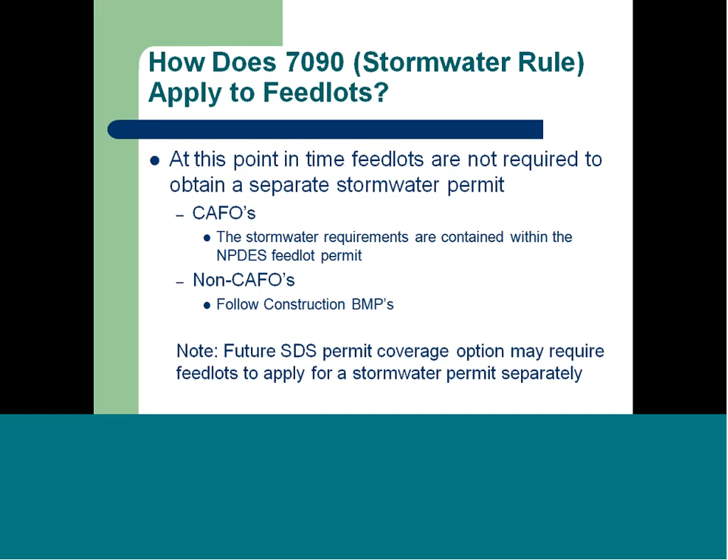So the basics of stormwater. If you're disturbing 1 acre or more of land, you need what's called a SWPPP, a Stormwater Pollution Prevention Plan. You have to develop one. Doesn't mean we have to review it, doesn't mean we have to look at it, just means you have to have one on site. Now if you're going to disturb 3 acres or more, which would be pretty large construction projects, then you are required to submit it with a permit application.

That really is different than it was maybe 5 years ago. You're required to automatically submit a SWPPP if you disturbed 1 acre, but this is more in line with the actual stormwater program. They don't look at all the stormwater pollution prevention plans either, they just do the bigger projects. So that's kind of what we're looking at there.

Now, if you're replacing existing pervious surface such as grass or cropland with impervious surface of 1 acre or more, you have to have a permanent stormwater management system. That's what you think of when you think of stormwater ponds, maybe an infiltration area for stormwater or something along those lines.

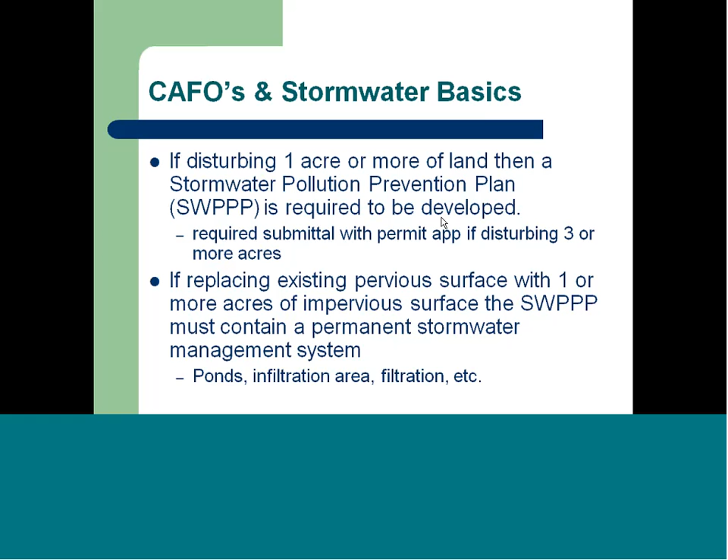For non-CAFOs, the basics are follow the BMPs laid out in the fact sheet. There are really no additional requirements. They can always get a construction stormwater permit, but the stormwater rule actually exempts them from needing a permit. It gives them automatic coverage underneath the stormwater general permit without even applying. This is all based on a 2004 memo that was done during the stormwater rulemaking process. So all they have to do is make the proper notifications, get the proper feedlot permit, and follow the construction BMPs, and they are covered with the stormwater.

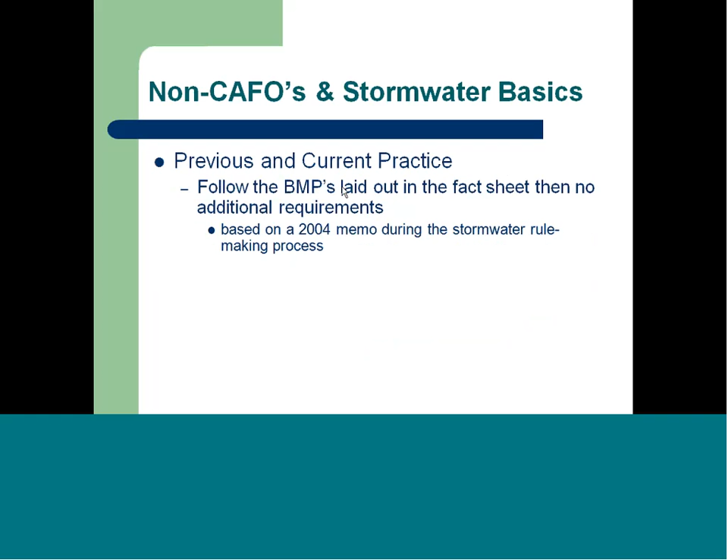Okay, the construction BMPs, these apply to all sites regardless of the need for a SWPPP or anything else. Some of these are pretty much common sense things. You don't want to disturb more area than you have to. I don't think anybody wants to do that. It just costs money to disturb that area. Stay out of there if you don't have to go in there.

Control the tracking of soil into roadways, maybe a rock construction entrance, something like that. Working at times where you're not going to track mud on the road. Tracking mud on the road is something that we get complaints about all the time. So the neighbors will notice if there's mud in the roadway.

Provide energy dissipation where stormwater leaves the site. Think of that as like riprap on the end of a channel to convey stormwater off the site, or a bale check of some sort to keep the water from running straight through the site.

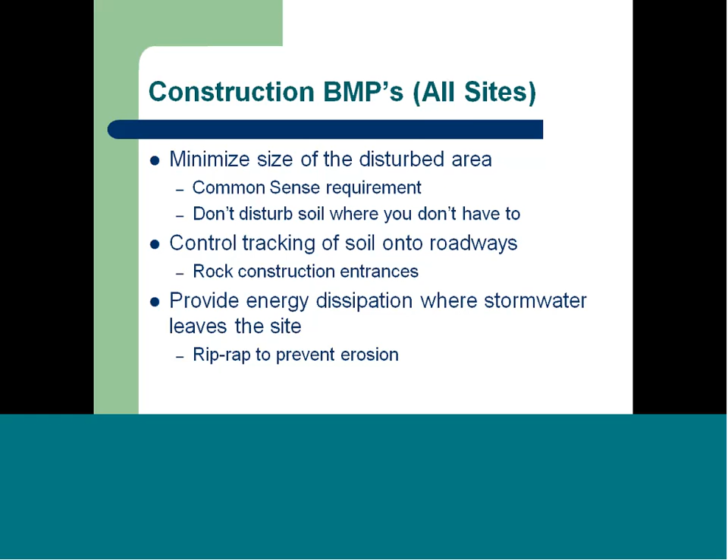Sediment controls they have to have in place. It can be a combination of grass buffers, silt fences, hay bales. What you want to have those are around surface waters and tile inlets. You want to establish them before you begin construction. You can't establish them after construction, during construction. You want to have them there before you start moving the soil.

What do they look like? Well, here's some examples. These are from a stormwater manual, so they've got stormwater grates in, but it could be a tile intake sitting there. It could be a small wetland of some sort in the middle here. You can see it's a silt fence around it, or they have sandbags on this one side. It could be straw bales. It could be something to protect the inlet.

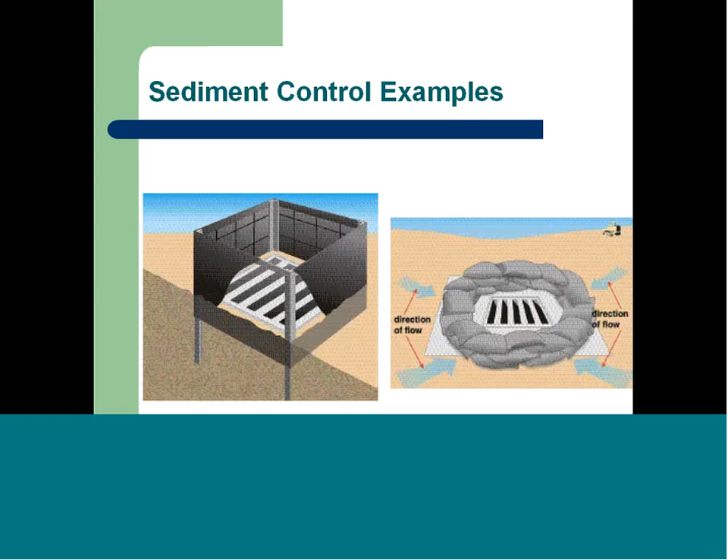The stormwater program is all about erosion control and minimizing sedimentation in waterways.

So there is also slope protection restrictions in the construction of stormwater BMPs. No unbroken slope of greater than 75 feet of length if the slope is steeper than 3 to 1. And if you're not going to be actively working slopes within 200 feet of a surface water, you've got to get a cover on those slopes as soon as you can. The different requirements are laid out there: 7 days if they're steeper than 3 to 1. If they're flatter than 10 to 1, you're looking at 21 days, so quite a long time to have them open if you need to have them open. If you're not going to be actively working there, they've got to stabilize those slopes.

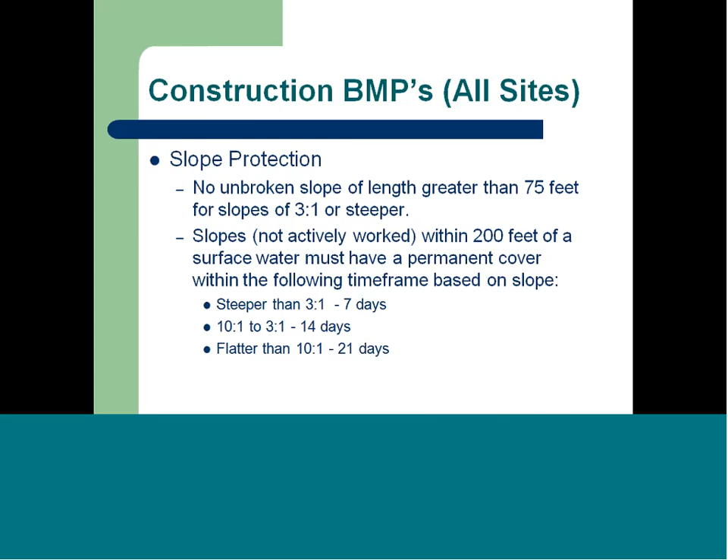On, computer, go. Oh, too far now. Oops.

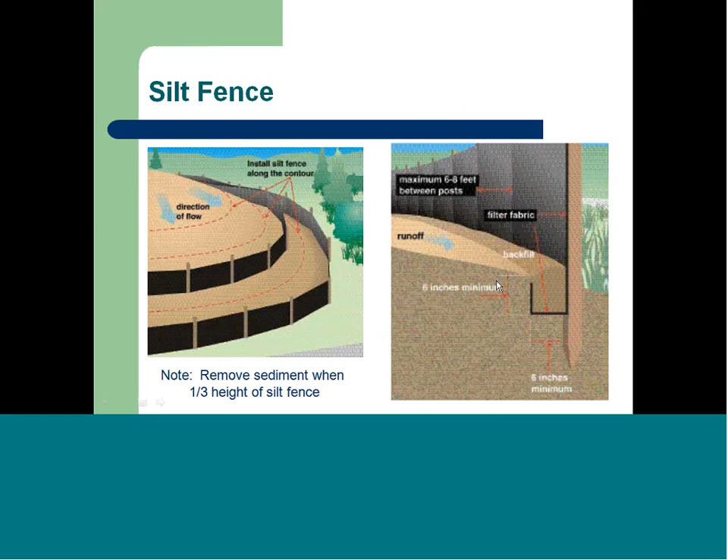For CAFOs, I'll quickly run through these as this is good more information for you than anything. You got to follow all the construction BMPs. That's for anybody. You look at these permanent systems when creating 1 acre of impervious surface. You don't count any impervious surface that's there, just the new stuff. So if they're building 1 new barn, they may have a total of 6 acres impervious, but the new barn itself is only a half an acre. That doesn't count to having a permanent system. And gravel roads are impervious surfaces. They're considered that, not pervious. So that's something else to keep in mind.

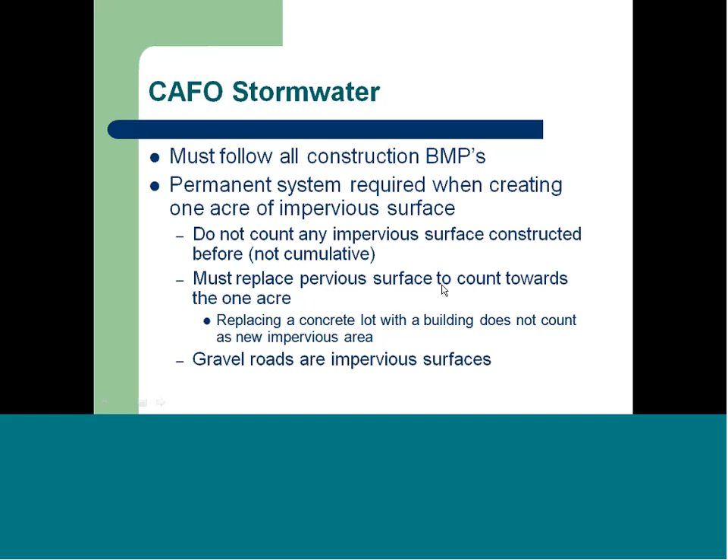The system has to be designed to treat and store a half inch of runoff from the new impervious surface. Doesn't mean you got to collect everything from, let's say, a new roof. It's possible if you collect half the roof on one side, you could meet your half inch of runoff total from the impervious surface. The rest can leave largely uncontrolled. Obviously, you don't want to go right into a lake or stream or anything like that, but it could go off-site without having much of any control.

And something else to keep in mind for permanent stormwater systems, they don't have to be designed by a professional engineer. Anybody can design them.

So if you get a SWPPP submitted to you, what do you do with it? Well, hopefully they used our form. We have a nice form on our website. It's pretty straightforward. You go through and fill out the blanks, answer a few questions, check a few boxes. You do a couple drawings of what you're going to disturb, where your silt fence is going to be placed, any sensitive waters close by, and it's complete.

Now, a little disclaimer here in this last bullet. This is not the official view of the MPCA, but personally, I have a hard time scrutinizing a SWPPP too much because there's a field tile intake right next door usually taking in all kinds of sediment. So I don't get too worried about SWPPPs as long as they do them, fill out the form, and have some controls in place for stormwater. That's really all I'm looking for. There's not a whole lot to do with stormwater.

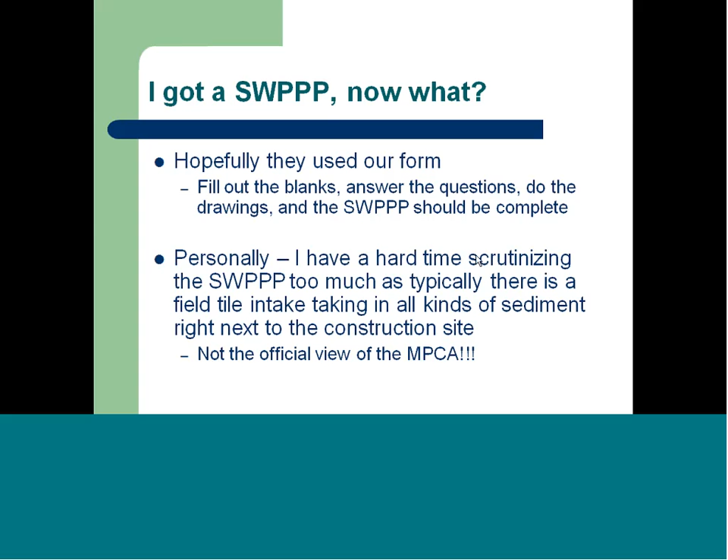So I think that's all I got for stormwater.

Here's a summary for you. A summary for CAFOs: develop a SWPPP if you're disturbing 1 acre or more. Submit a SWPPP with a permit application if disturbing 3 acres or more, and it requires a permanent system if you have 1 acre of new impervious surface. Non-CAFOs, you follow the BMPs. That's really all you have to do.

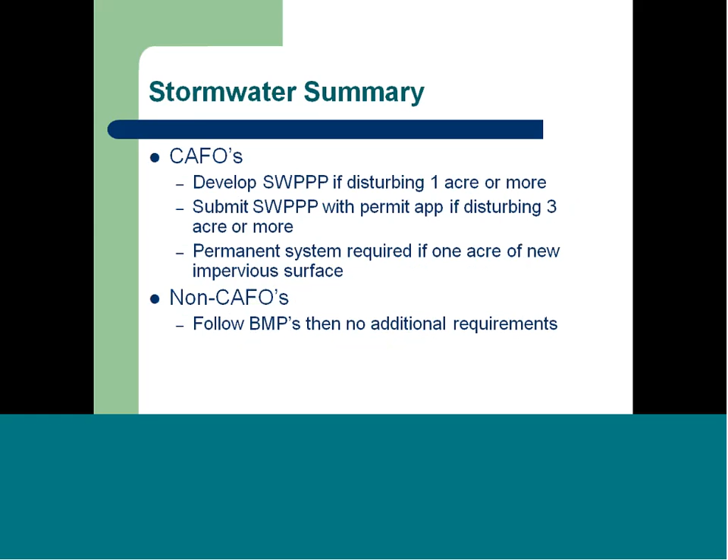Like I said, the biggest thing for stormwater is make sure they follow the fact sheet with the BMPs. They get the silt fence up before tile intakes and before water features. If the runoff goes out to a field that has a low spot in it, there's no intake in it, there's really no need to do anything. If it's going into a road ditch, or there's an intake in the road ditch or something like that, then you got to put up a little silt fence, prevent silt from leaving the site.

Okay, we've got a couple questions coming in, George. One, basically what you just answered: do they need BMPs if the runoff doesn't lead to a surface water or intake? So that would be no. No. And then you don't got to silt fence your entire site, you just got to protect the inlets and the water body.

Road ditches? Well, if the road ditch has an intake in it or runs right to a drainage ditch, then yes, you'd have to do something, but it really doesn't go anywhere, so not too concerned about it.

Okay, there's another question that says, who does enforcement when there are stormwater issues? Construction stormwater folks that do that, we would not do enforcement personally. We turn it over to our other program that does that.

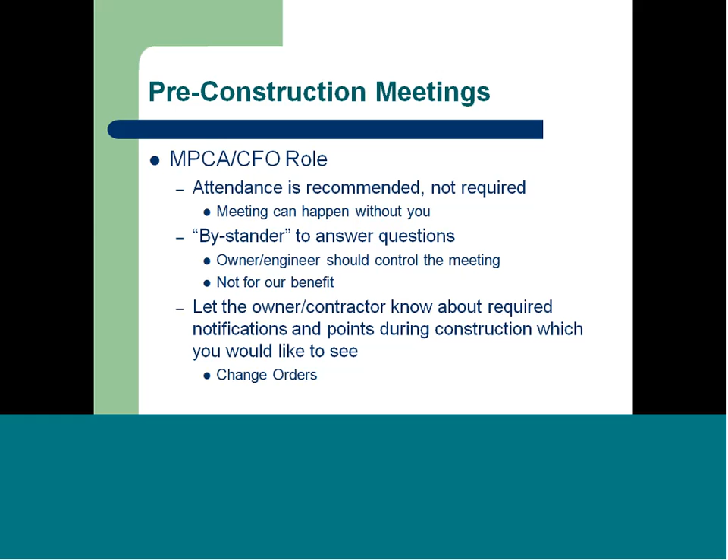So once you get past the pre-construction meeting, the rule requires construction inspections of liquid manure storage areas. Who must inspect these? Well, it's the engineer that designed the structures who must inspect them, or a person they designate working under their direction. There's no restriction on who they can designate. Technically, they could designate the owner to do the inspections for them.

Doesn't happen very often, but they could do that. It could be a qualified NRCS staff person, so if it's an NRCS job, a cost share job, they could be doing the inspections. And if you're inspecting a concrete liner, you could have somebody ACI certified or MnDOT certified do the inspections outside of the engineer or NRCS staff person.

So what should they look at? What do they need to observe? Well, they want to look at the subgrade conditions, the moisture conditions of the soils, if frozen or too wet to pour, the location of perimeter tile monitoring ports, and then repair any defects they find, and look for any unauthorized liner holes, liner penetrations, water lines going to the pit. We can't have those. That's what they should be looking for.

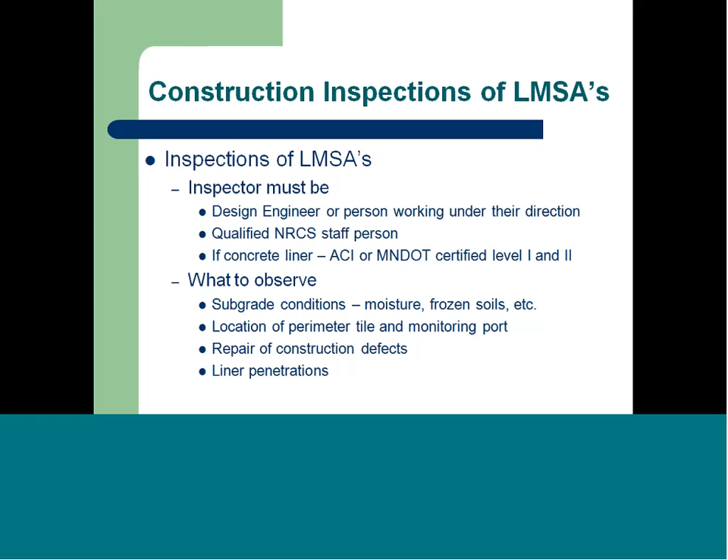Okay, when do you want to do construction inspections? Well, there's a couple of key points of construction. One you may want to go out and look at is after they dig the hole. Is the subgrade good? Is it uniform? Is there any bedrock that they encountered that they didn't find in the borings? Is it too wet to pour? So you want to look at the subgrade and make sure it's okay.

Going out when they're doing the liner installation, the floor pour, or the wall pour, looking at how they're doing the work. Is the rebar in the proper spaces? Is it all up to par with the plans you approved?

And then afterwards, you go out and check for defects. Sometimes we'll get requests from a CFO or an actual owner to come out and take a look at it. A lot of times, the owner will actually want us out there. It's one of the few occasions they want us out there to make sure they're getting what they paid for, getting a quality product. They like to have us out there, so there shouldn't be a big issue with going out there from the owner's standpoint.

And then if we get some complaints, obviously we'll go and validate those complaints or look at complaints of construction.

Okay, there are construction notification requirements in the rule, and the first one is: any change to the approved design must be approved by us. We can't just go ahead and do it. Now, there may be a case where a very minor change happens, like the wall moving 3 inches. We're not going to be concerned about that. But if it's a large change, such as making the pit bigger, that has to be approved by us. If it's changing the thickness of a wall or a floor, it needs to be approved. Changing the spacing of rebar needs to be approved. All those things have to be approved by us.

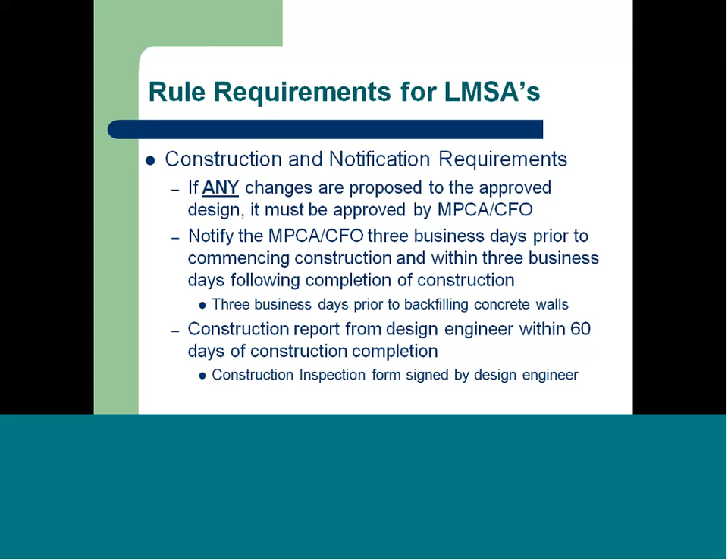And then there's a construction report from the engineer within 60 days of completion of construction, which includes our inspection form signed by the engineer. That's a pretty basic requirement.

All right, so when you go on construction inspections, what do you take? Take some identification. A lot of times you won't need it because construction sites are busy. There's people coming and going at all times, maybe 5 or 6 different people a day coming and going from the site. But take some ID along in case they want to see it.

Bring a camera, boots, a ladder if you got the opportunity to grab one and take it out there. Grab a can of spray paint so you can mark up defects you see. Bring a tape measure to measure things, and bring a copy of the plans. A lot of us, including myself, think these are all cookie cutters, and sometimes they are, sometimes they're not. Sometimes there's special features that they need installed on the pit. So bring a copy of the plans along with you.

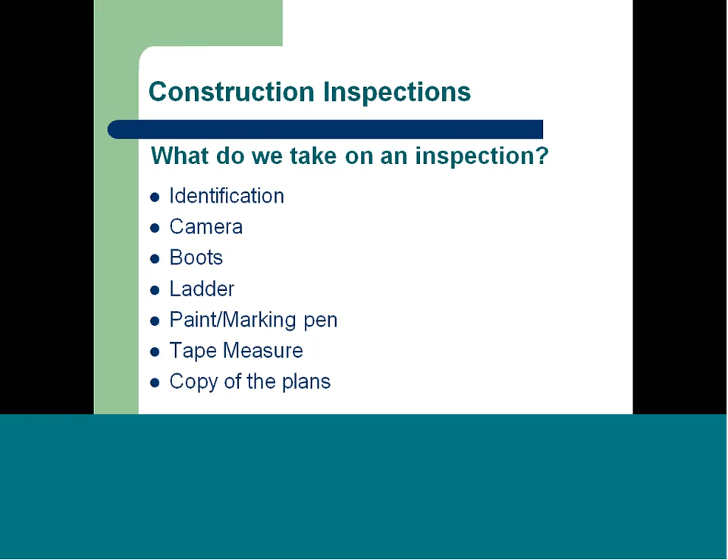What should you be aware of on a construction inspection? Practice safety first, obviously. Watch out for construction equipment. They're not expecting somebody to be right behind them all the time, so watch out for them.

If it looks unstable, it probably is. Don't go in there. One rule is don't enter a concrete pit when they're setting slats or beams. Those things can slip off and fall, and you hate to be underneath one of those if it falls on you.

Park your vehicle out of the way. I like to park on the road and walk in. I don't want to get in their way and have to move my vehicle, or have somebody back into it. Stay out of their way. They're there to do a job, and they don't necessarily want to be chit-chatting all day long. So get out of their way. They're doing their job, you do your job, and things will be good.

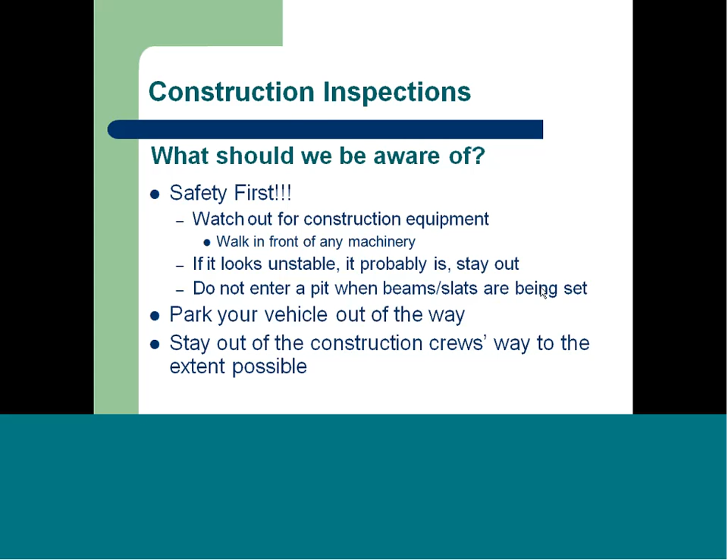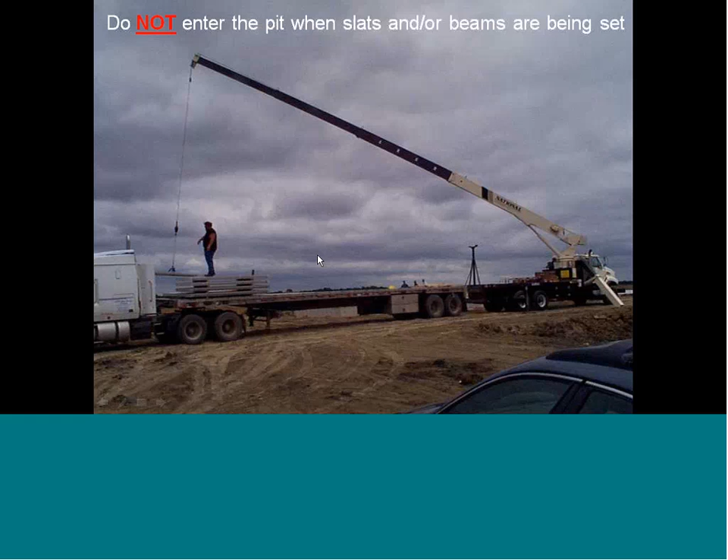Look at the water table, is the hole full of water? Is there water seeping in? Did you encounter any old tile lines? Do they have the soil removed for the footings required for the columns or pump-outs? Is all that in place and ready to go?

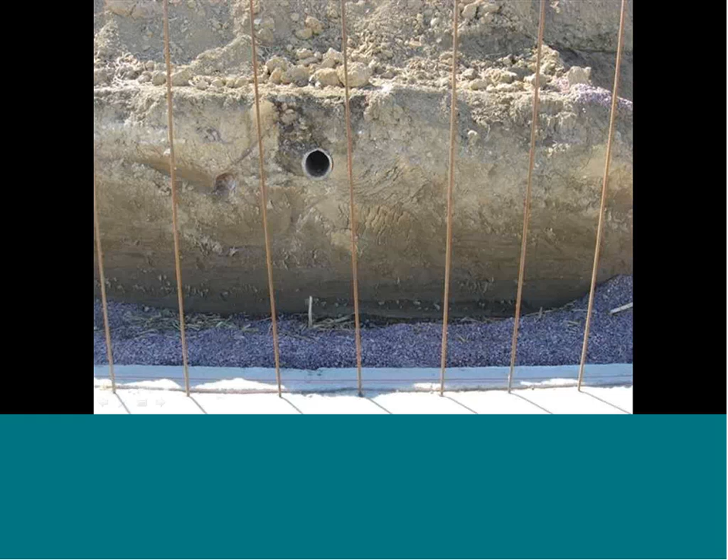Here's a picture of an intercepted tile line. This is an old one that's not actually functioning anymore — it's an old clay one, or a concrete tile, I should say. But if you see something like this with water running out of it, they've intercepted an active tile line, and they've got to reroute that around the pit. So that's what you could see when you look at the subgrade.

Has the soil been removed for the wall footings, pump-outs, and column footings? Columns need footings, that's the long and the short of it. So if you get an engineer that doesn't put column footings in, let us know. They have to have footings.

Is the reinforcement there? Are the forms there? Are the forms sufficient to make a 5-inch floor? Are the pump-outs formed as part of the floor? That's how they want them formed up, not poured separately.

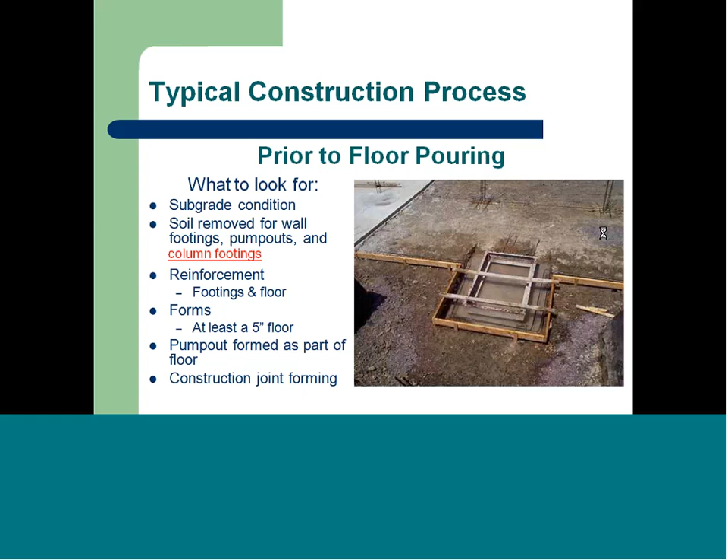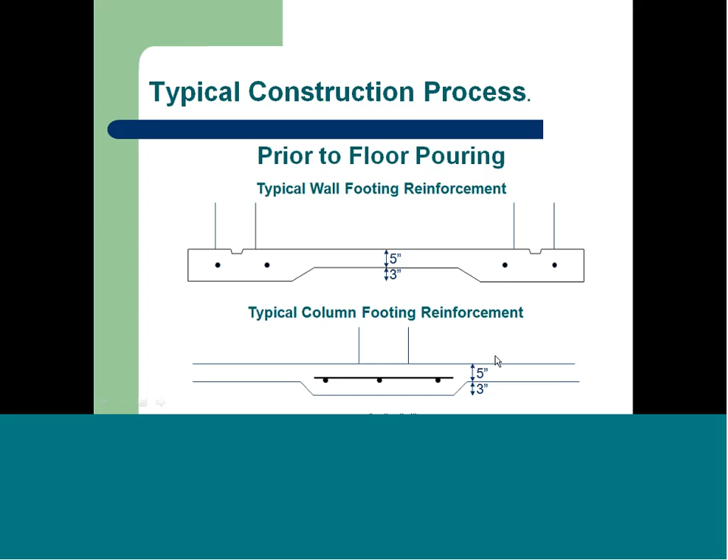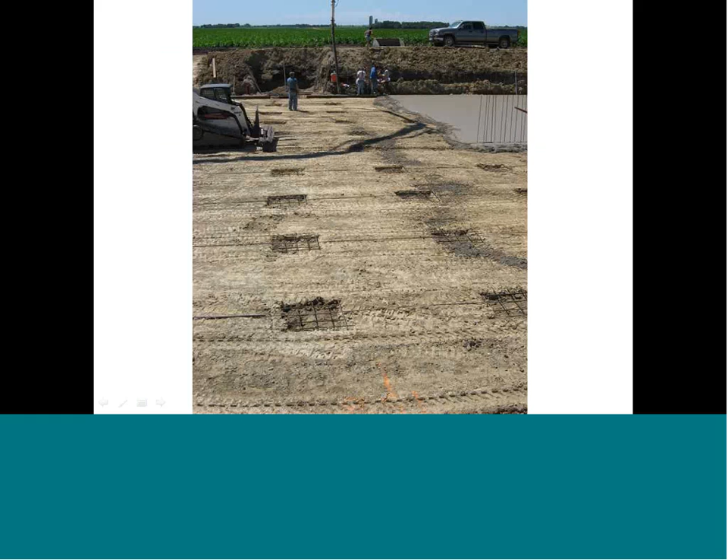All right, floor pouring — what do you want to look for when they're actually pouring the floor? Again, take a look at the subgrade. Did it rain recently? Is it too wet, lumpy? Check the reinforcement in for the column pads.

Is a keyway being formed as they're pouring? A keyway — we'll get a closer picture of one here in a second — runs along the outside of the barn, basically a 1 by 1 by 1 groove in the concrete. Is the wall steel in place? They don't have to tie it into the footing — they can actually stab it in as they're pouring, coming along and stabbing it into the footing, approximately 12 inches apart.

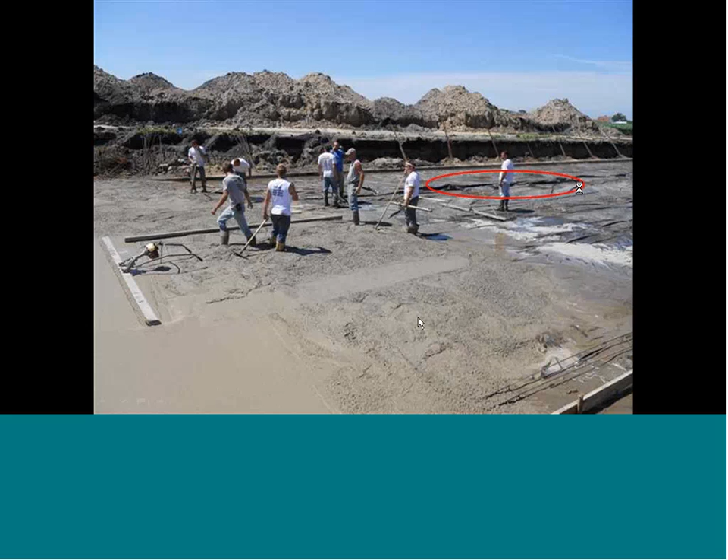Now this is the same site probably a couple weeks later. This is a site that just happened this spring, and some of you in the southeast will recognize this site. This was a very wet site to pour. You can see some of the water that's actually getting pushed with the concrete as they go. This was the good end of the barn. They started working here and pushed the water as they went. That's okay. You can push a little water with concrete.

You see this big red circle, that's a little hump in there. What happened is this subgrade here was very poor. It was really wet and slimy and muddy. So they laid down basically landscape fabric to pour on top of to get a good firm subbase. That wrinkle you see there is actually the fabric. So they got to make sure they get that flat when they start pouring their floor, or they're not going to have their 5-inch floor.

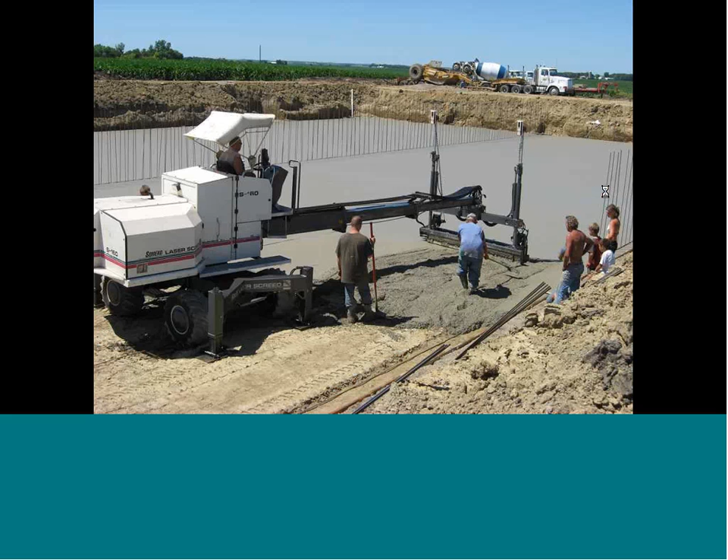Another example of a floor pour, you can see this is a laser screed in there. It's working its way back. See, subgrade's real nice. You can see right behind the tire they got the concrete, the column pad footing dug out, rebar in there. That's a good example.

Okay, wall pours. What do you look at for during a wall pour or prior to a wall pour? Look at the reinforcement, make sure they got proper spacing. Is the rebar pretty much level, or does it go up and down all over the place and not tied very well? Is the keyway clean? Is the water stop in place? Are the rebar all full of mud? If they are, they're not going to get very well secured in the concrete. They can get rid of the mud.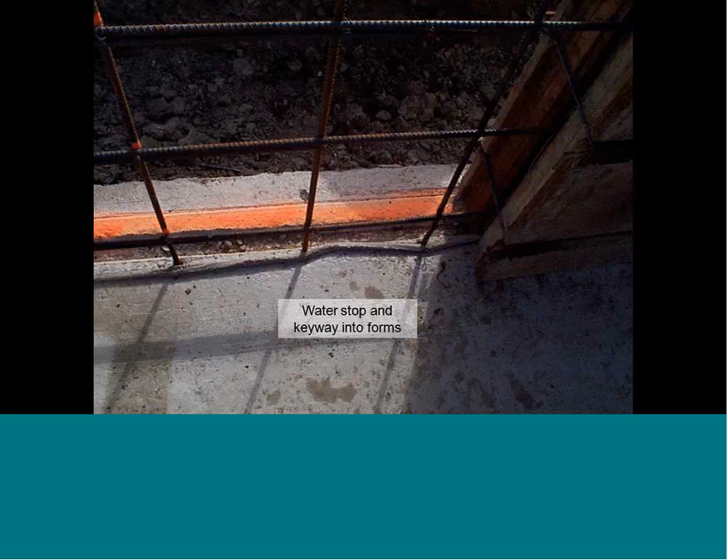You can see it on this rebar. This crew did a very nice job. They painted where the rebar had to go so they could keep it evenly spaced. It's really nice and spaced every 12 inches. Looks real good.

Here's some rebar inside the forms. And I look at, is the rebar somewhat centered in the form? Now, obviously, it's going to shift a little bit as they pour concrete, but is it just all against one side of the forms? If so, make sure they know they got to push that back to the center of the wall when they pour it. You want to have it pretty much in the center of the wall, maybe a little bit to the outside.

George, there's a quick question that says, can the rebar be in the keyway? Yes, yes, that's fine.

Now, here's a rebar cage around a pump out. The thing you want to look for here is around the corners, the rebar has to be bent. One piece of rebar bent around each of the corners. They can't have a butt end, so one piece can't come in end and another piece start right next to it. They got to be bent around each of the corners.

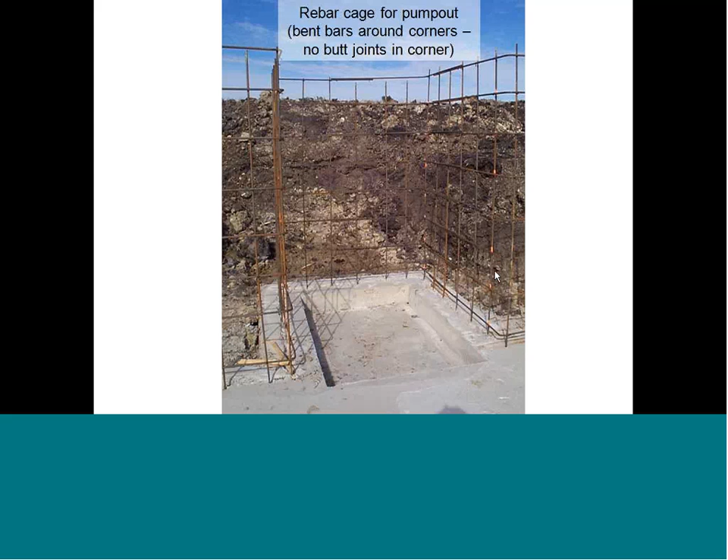Here's rebar spacing. This is 12 inches on center. Very nice, 12 inches on center.

Okay, during the wall pour itself, here's a picture of them actually pouring walls. What do you want to look for? Again, look at the reinforcement. Is it okay? Is everything clean? Is there mud in some of the forms? Are they just working at a frantic pace to try and keep up, or is it too slow? Are they working at a proper pace?

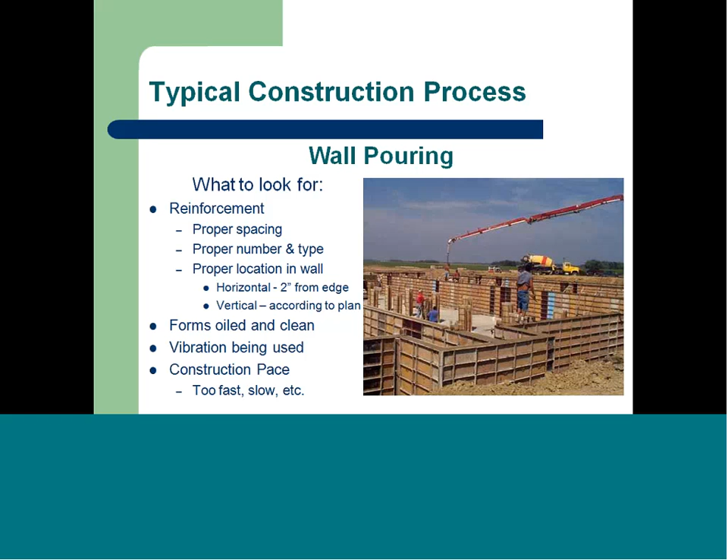That's something you just got to learn to judge by being out at construction sites, the pace. I can't tell you exactly how fast it should go or how slow it should go. That's something you just got to learn.

Here's them pouring walls with the big, large black tube you see on top actually providing the concrete. The guy in the black suit has a vibrator in his hand. You see the little motor of the vibrator right there. He puts a long rod down and vibrates the concrete to make sure it gets all the way to the bottom of the form and sets up real nice.

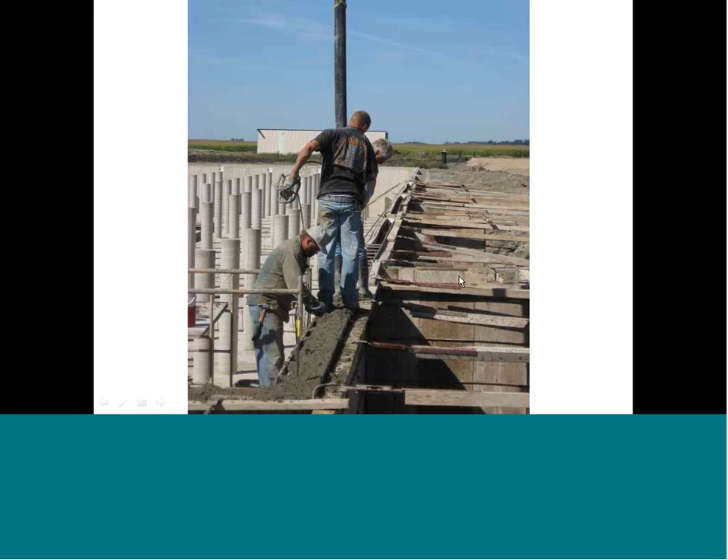Okay, on perimeter tile, what to look for is it 1 foot from the footing and is it below the floor? And is it working? Is it crushed? Those are the things you really want to look for.

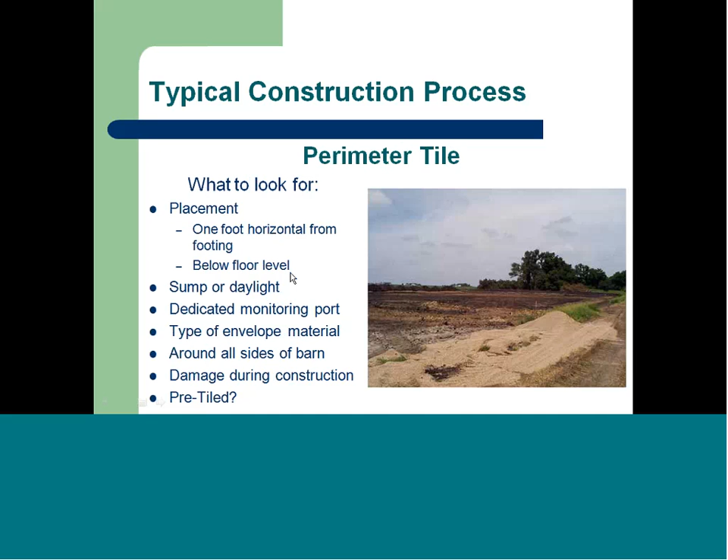Pictures here for you. This tile here is actually a little close to the footings on the pump out, so we had to make them move it, but you can see it's not crushed. It has a nice sock on it, ready to be backfilled with some granular material and then backfilled with the existing topsoil.

George, there's one other question. Sorry to interrupt your tile, but it was a quick question about rebar. So how much fudge factor for the 12-inch rebar spacing do you work with?

Well, again, it depends on the engineer and depends on the barn. Typically, engineers will spec out the rebar 12 inches on center, vertical and horizontal. Some engineers are pushing that to 14 inches on center. It depends on the engineer.

As far as fudge factor, a couple spots, if it's 14 instead of 12 or 15 instead of 12, not that big a deal. If it's consistently 14 and it's supposed to be 12, make them move it. But if it's one spot where they got a little sloppier, a bar fell down and they quick tied it in, it's not a huge deal if it's an isolated incident.

Okay, thanks. Sorry to interrupt. That's fine.

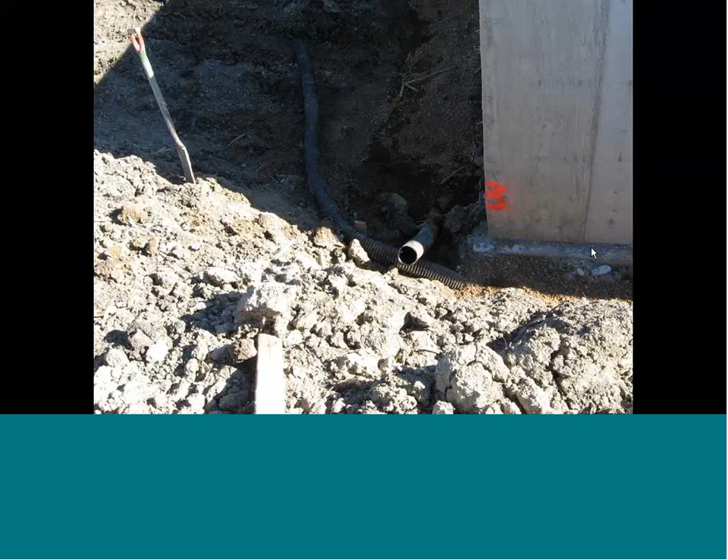Here they don't have their tile port lined up yet. Next picture will show their monitoring port. It's right here. So what they usually look like is a large pipe going down to that tile inlet, so they have a chance to visually observe it and potentially take a sample if there's a leak suspected.

Around the base of the barn, George. There's a couple questions coming in about the tile line. How flat or level does the tile need to be around the barn? If there's some bumps in it, is that a big deal? Because I've seen it with different variants, where it's not flat.

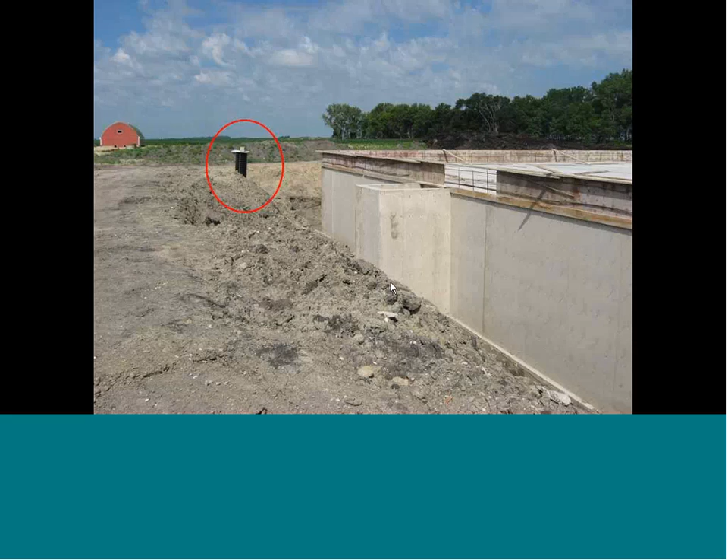Ideally it'd be nice if it was flat, but obviously it's not going to be perfectly flat. If it humps up, if the bottom of the tile is above the floor elevation, make them move it down. Let me go back to that picture. You can see here, this top of the footing is the top of the floor. So if the tile comes up above that, it's no longer at or below the floor level. You got to make them move it down.

If it varies a little bit, if there's a little hump in the middle, and half the tile is above the floor and half is below, that's okay. It'll still flow and get its job done.

There's one other question that says, when is a sock or gravel not required for a perimeter tile install? It's not required that they do it, it's recommended. A lot of engineers will do it, a couple will not, so it's not required. It's a good practice to do, keeps your tile from silting shut, but we don't flat out require it.

Okay, there's no more right now.

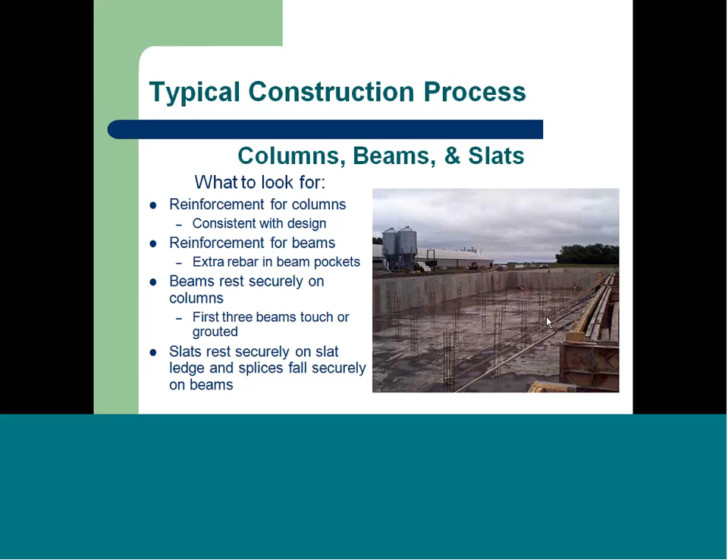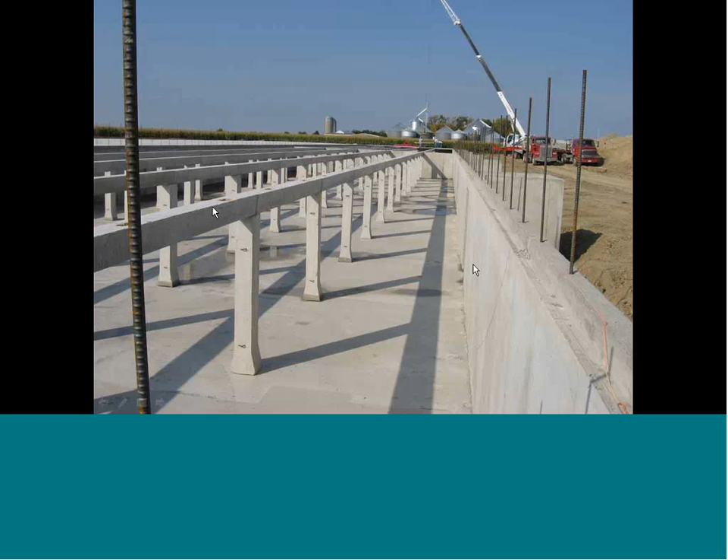Other items you want to look for during construction: do you ever see the engineer on site? You may not run into him at the same time, but you can ask the contractor, has the engineer been out there taking some readings or looking at the site? If he's not been out there, there's an issue. Or his inspector, I should say, has not been out there. Are they doing some testing?

How many concrete trucks are on site? A lot waiting in line. Are there 8 trucks in line waiting to pour concrete? I said, all right, that's a problem. They need enough crew members to keep up with the trucks, otherwise they're adding a lot of water to the concrete.

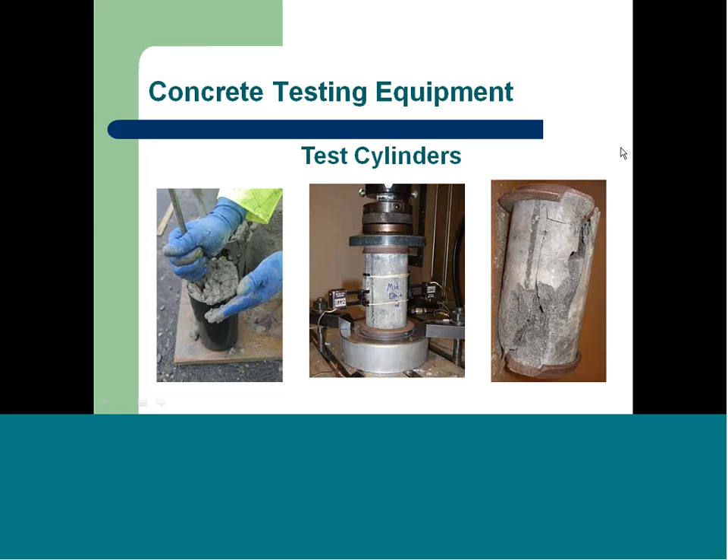So they have to do cylinders, and that needs to be spec'd out in their plans and specs of how many they have to do. The checklist we have prepared tells them how many they have to do. I can't remember off the top of my head how many it is, but it's in the checklist.

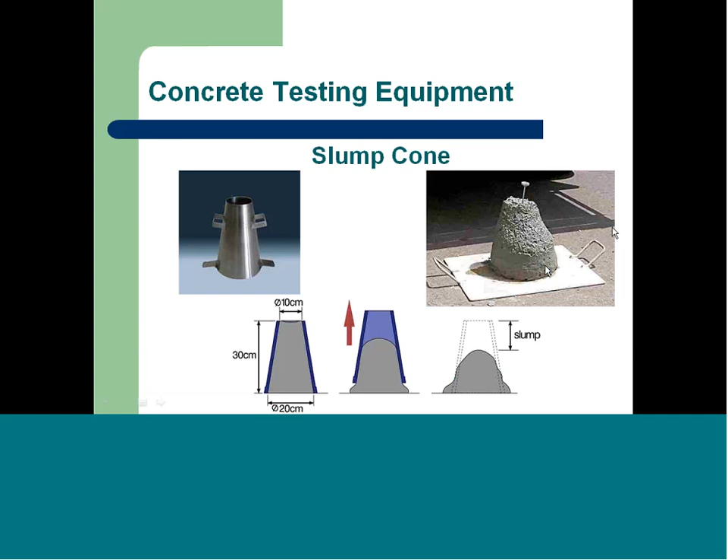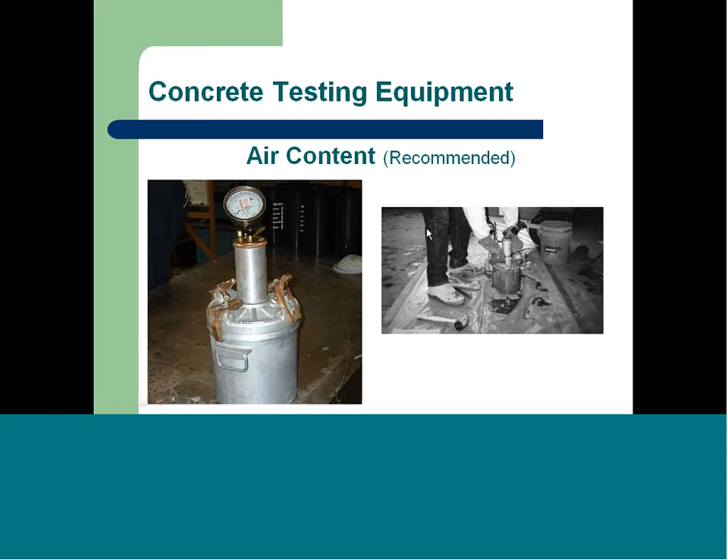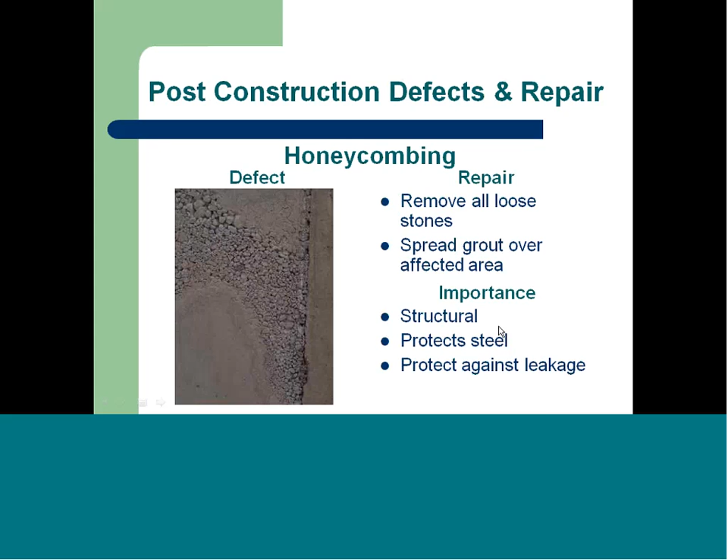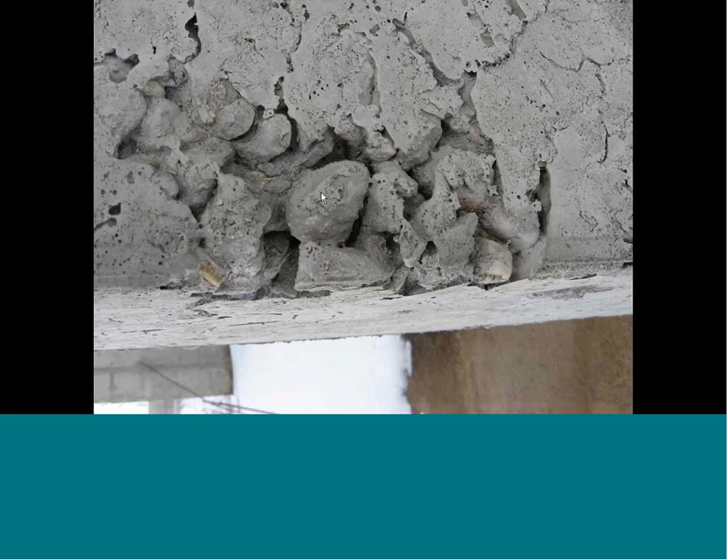Here's a close-up picture, you can see the actual individual rocks in there. Sometimes you can actually pick them out if you want to. You can pull them right out of there.

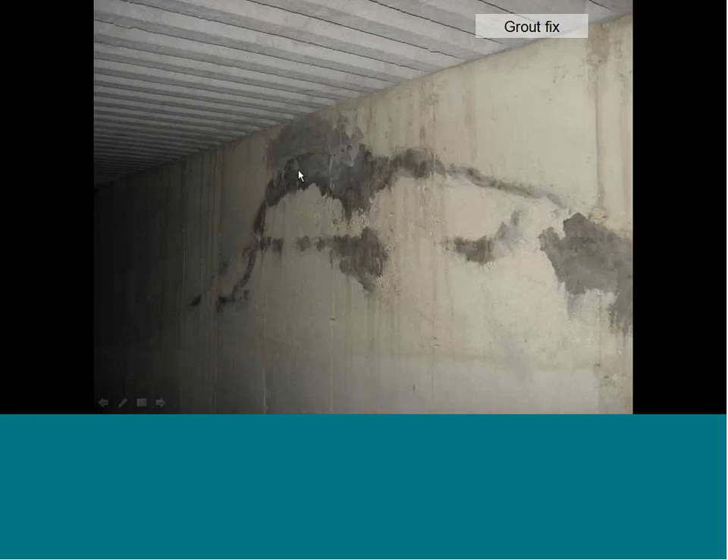Here's how they fix it. They can smear it with grout. This is a grout fix. Just basically smear over the top of it to make sure it's sealed up and no water is getting into that rebar. And here's an epoxy they can apply as well.

Cracks. Cracks that go all the way through have to be sealed. How do you know if they go all the way through? That's a good question. On the floor, the walls, you can tell.

The floor, you can't really tell for sure. The rule of thumb I use is, if you can get a credit card in them, you got to fix them. There's no reason they can't fix them all if you want them fixed.

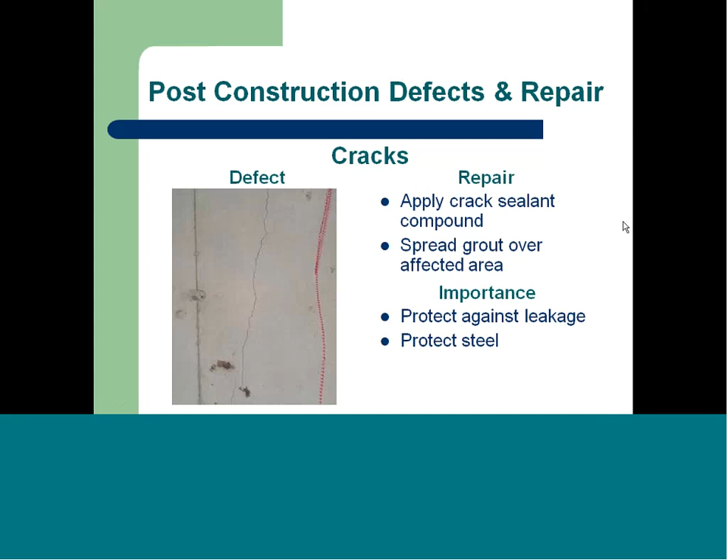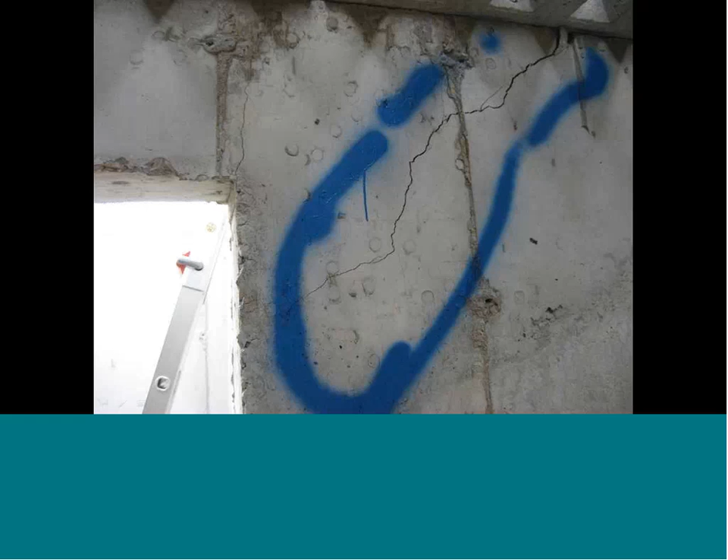Again, it's grouting. Here's a big picture of a crack you can see here. This one's obviously thicker than a credit card. Needs to be fixed. See the nice paint I did on there?

It's a wall crack. That's pretty small, but I tend to mark a lot of wall cracks, make them fix the wall cracks. I've seen a lot of water come into barns through a wall crack.

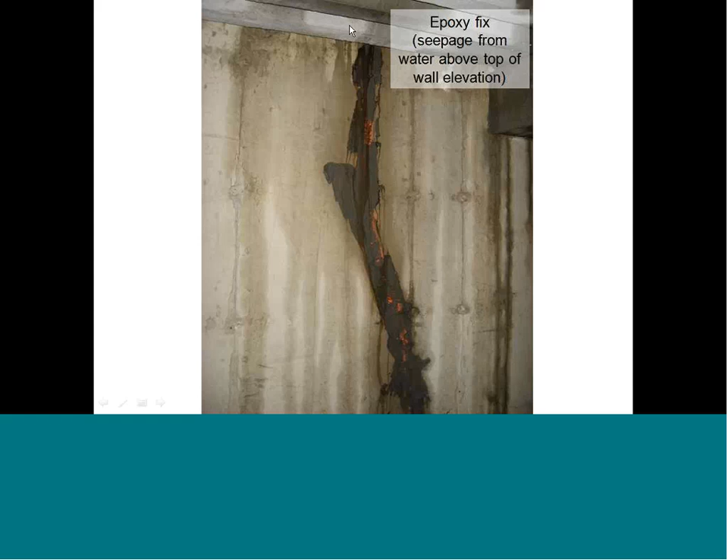Here's an epoxy fix. Fix up the crack here with epoxy. See the water seeping in there? That's not from the crack, that's from above. This barn has not been properly backfilled yet, so they had water sitting outside.

And here's a grout fix. This is basically grout smeared in the floor crack. Seal it up.

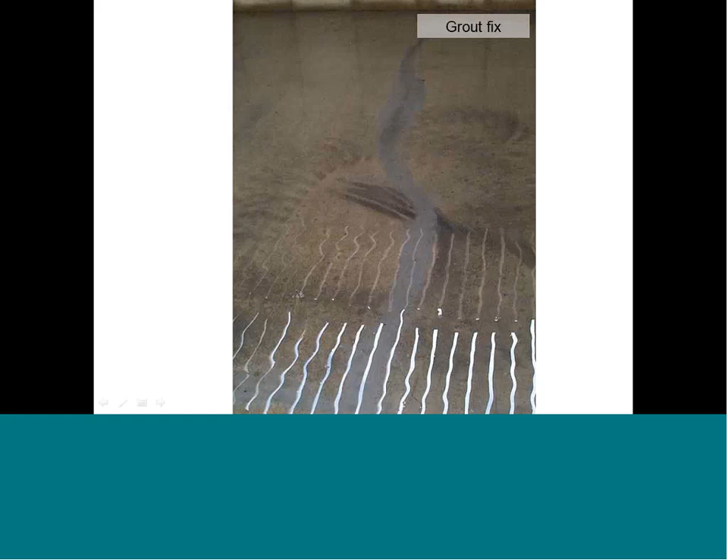Exposed rebar. Hopefully you don't see this very often, but there's times you will see this.

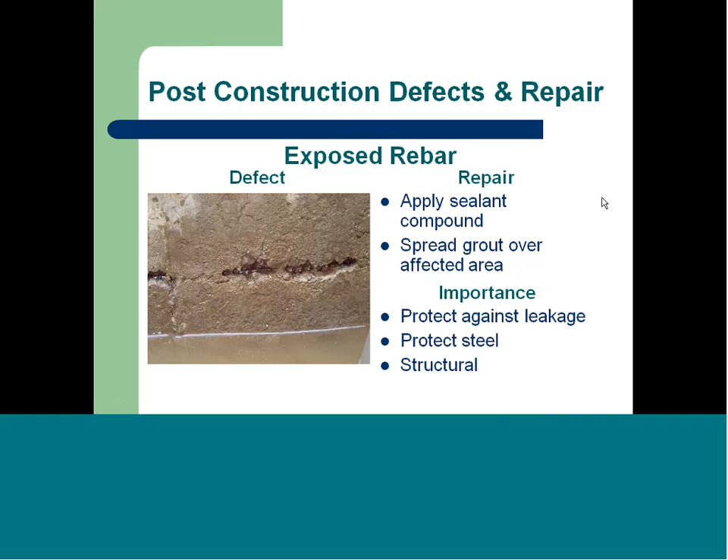Why is it important? Obviously, there's your strength, and your steel right there is getting eaten away by manure. So you want to make sure you get that sealed up. Again, it's the same fix as everything else. It's sealant compound or grout over the area.

Here's an exposed rebar in a column. Needs to be fixed.

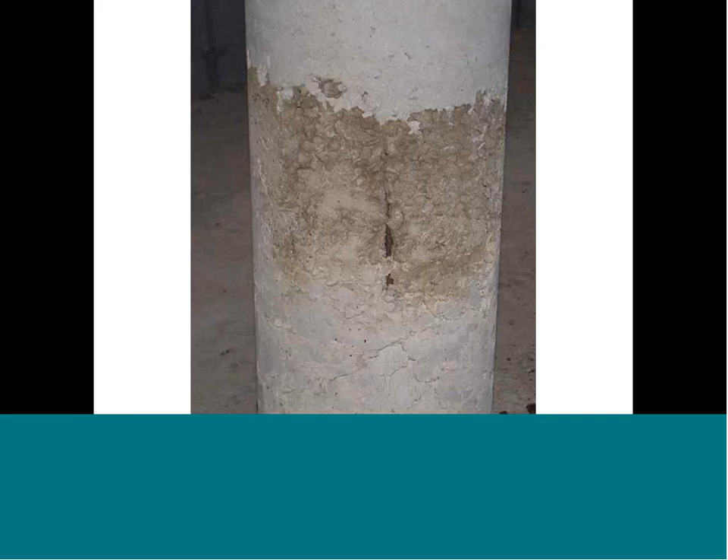Mud balls. These tend to appear in like a rash, really. It's basically, there's no concrete there. It's just mud in the floor. There's no concrete at all, or maybe 2 inches of concrete and mud on top of it.

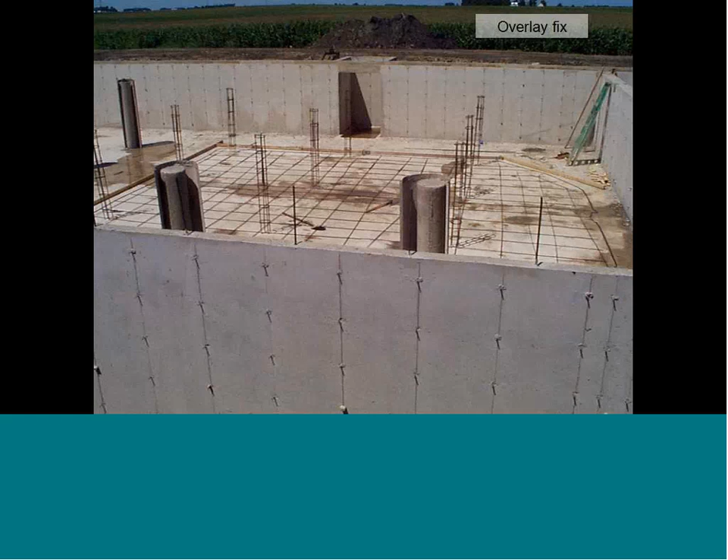Here's how you fix them. You fix them either by patching individual ones, which can be done in isolated cases, but if you get a lot of them, you'd be looking at an overlay of the concrete. In this case here, you can see they had to overlay quite a big area to fix the mud balls. This is one area of the barn they had to fix, or clay balls, as some people call them.

And how do you know what to even look for? Well, you can see here, sometimes they'll be indicated by discolored concrete.

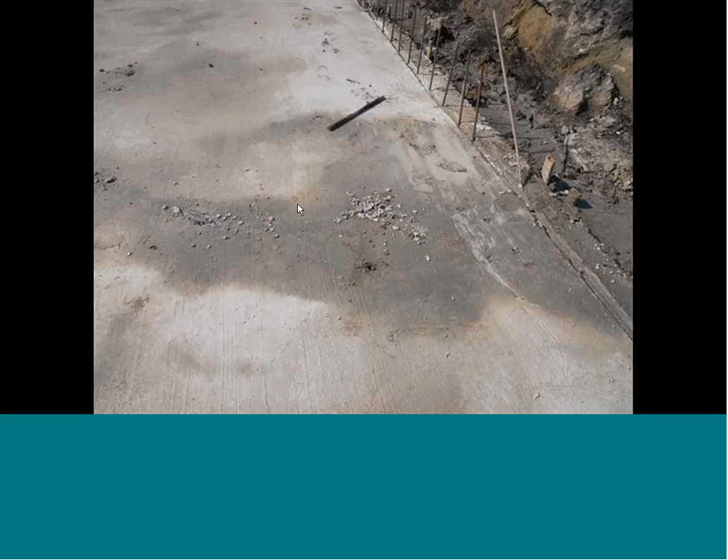Could have, yeah. Or in this footing here, you can see the concrete's kind of discolored, and you'll actually be able to take a rebar, just tap on the floor, you'll go right into it. So there's always a piece of rebar laying around, so feel free to grab one and tap around the floor and see how it sounds.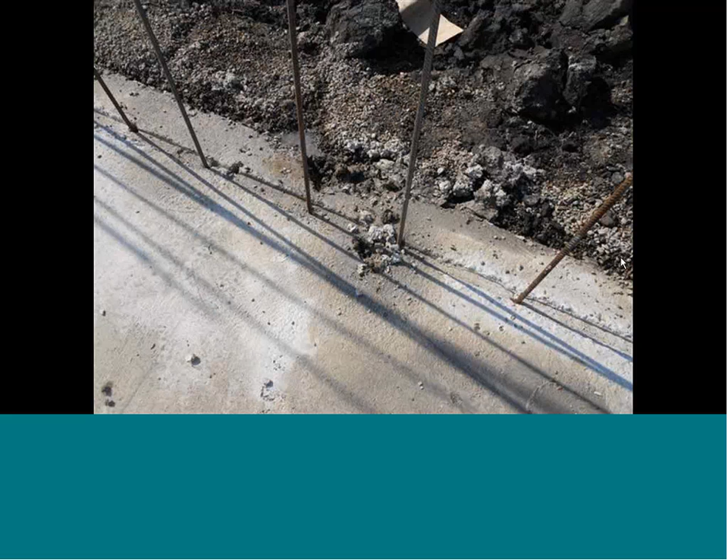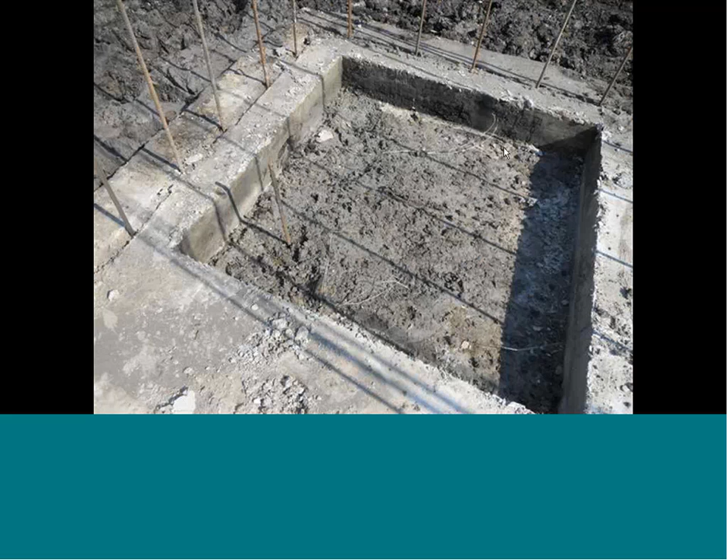Now this previous picture and this picture here are all from the same barn. And this picture here looks like a pretty decent pump out, actually. But if you look closely, you notice I stabbed a rebar into the floor of the pump out.

That was luckily I did it before I took a step into it to see if it was concrete. I would have sunk up to my knees in mud. It's just mud, there's no floor in there.

So what happens when something like this takes place? Well, you work with the engineer and the owner to get it fixed up. And this is the plan for repair in this one particular barn.

They ended up cutting off 3 pump outs and replacing them totally. They ended up cutting out the footing along the entire length of this end wall. And all these gray areas were footing cut out and replaced.

Time-consuming, costly measures to do, but had to be done. You see, they had to do an overlay because they had mud balls. And in the end, they ended up overlaying the entire floor of the barn, not even just one area.

The mud balls are isolated to this area, but due to other issues with construction out there, they ended up overlaying the entire floor. So it can be costly to fix these things, so this is why we do the inspections, to make sure things are done right ahead of time.

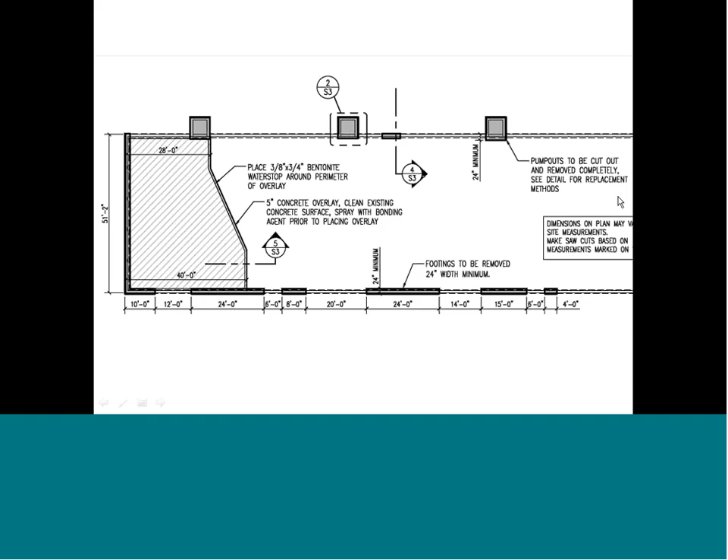Occasionally, you'll see holes in the wall. The only time there can be a hole in the wall is if it's for manure transfer piping. Anything else cannot go through the pit wall.

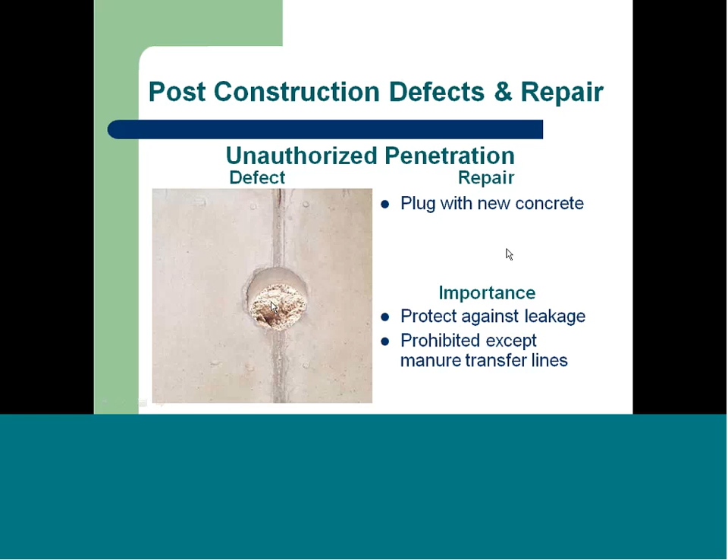This one here, the beams, look at the beam spacing. You can see this beam here is barely resting on one of the columns. Not a very good thing.

You want to make them move that more to the center of the columns. Make sure they get a good

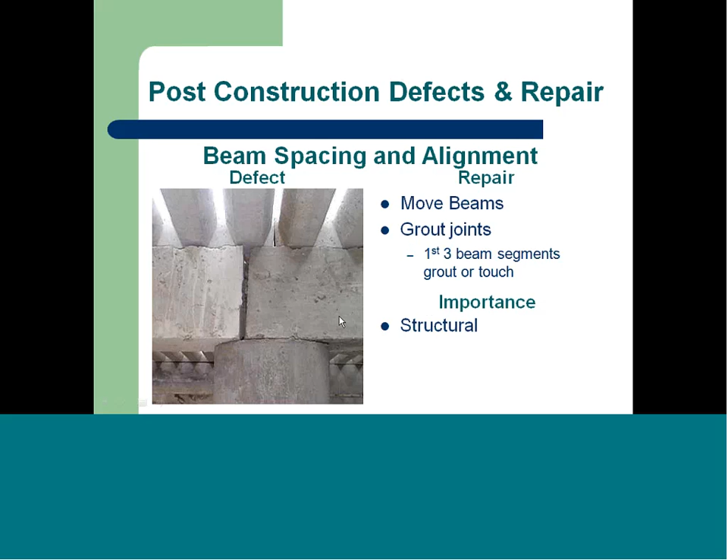centering on the columns. And occasionally you'll see large gaps in beams. You want to check out the first 3 or 4 beams from the end wall and make sure they either touch or are grouted. That provides extra support to the end wall itself. After 3 or 4, friction kind of takes over and the wall can't move anymore. So check out the first 3 or 4, make sure they have some grout in there or are touching.

And then this one here, you want to make sure that the columns are tall enough. They ran a little short here on their forms and ended up trying to use patio blocks from Menards as a shim. And we said, no, you can't do that. So you can't use patio blocks as shims.

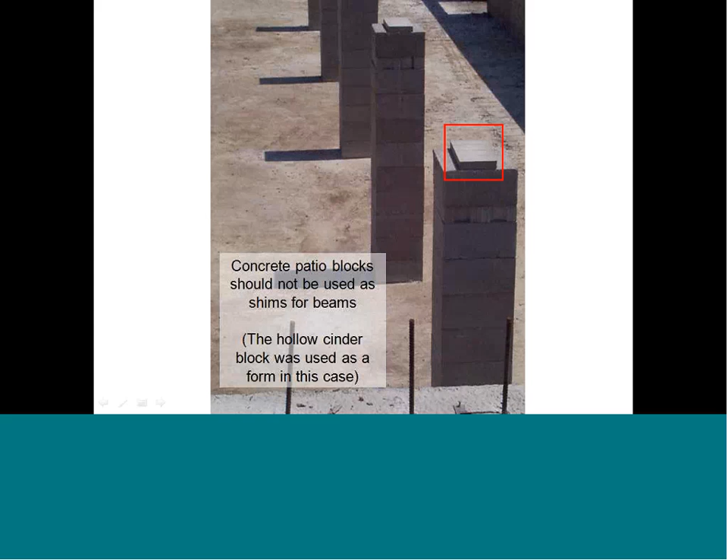Okay, quickly on precast LMSAs, you see these occasionally. Majority of them are from Weiser Concrete out of Wisconsin. So what do you want to look for in these? First of all, make sure they have a plan stamped by a Minnesota engineer. That's always an issue with Weiser because they don't like to stamp them with Minnesota engineers for some reason.

It has to have a Minnesota engineer stamp on it. Make sure it's a Pan-L built system, not the L panel. The L panel is not approved for manure storage. Pan-L built is.

Make sure they're doing a Type 3 floor. The Type 3 floor is poured on site and has a large groove in it. You can see in the corner of this picture here, the wall actually sets into it. That's the type of floor you got to have.

Make sure they've done some soil borings. Weiser does not do soil borings typically. They'll be done by some third party, and the tile will be addressed in those borings.

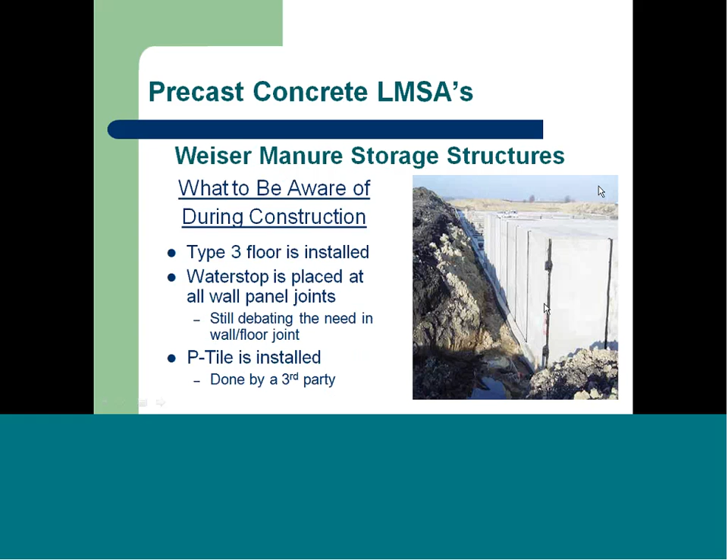All right, quickly on earthen basins. For construction of earthen basins, it's very hard to look at specific items. If you go out to a site, make sure they're using a sheep's foot roller to compact the material. That's really all you can look for during construction of an earthen basin. Are they using a sheep's foot? Is it sticking the sheep's foot, or is it coming off? Can you pick up a piece of the material you're using and make sure it's sticking together good enough?

That's all you can really do for liner testing that you can see on site. What you want to look for is damage from agitation. Make sure they have protection from damage, specifically concrete pump-out ramps. The pump-out ramps themselves need to be 16 foot wide, and the pads in the bottom of the basin have to be 20 by 20.

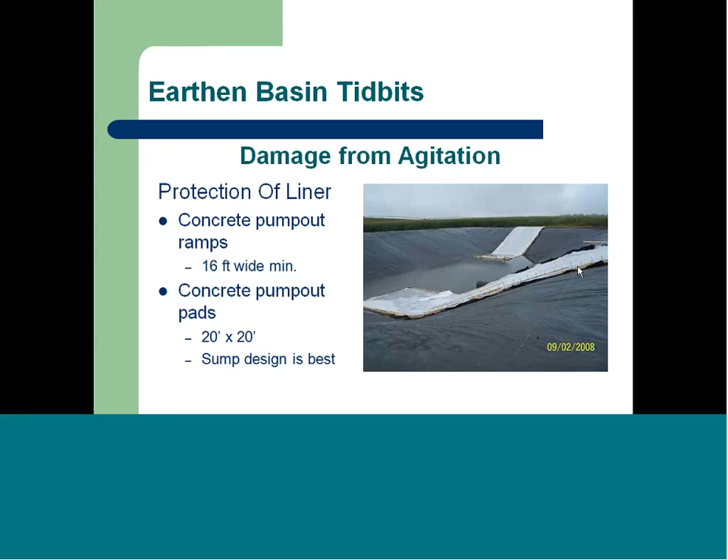And then why would you want to have them in there? Otherwise, you end up with features like this. They back down wherever they want, and they get a little mottled area in the middle of the basin.

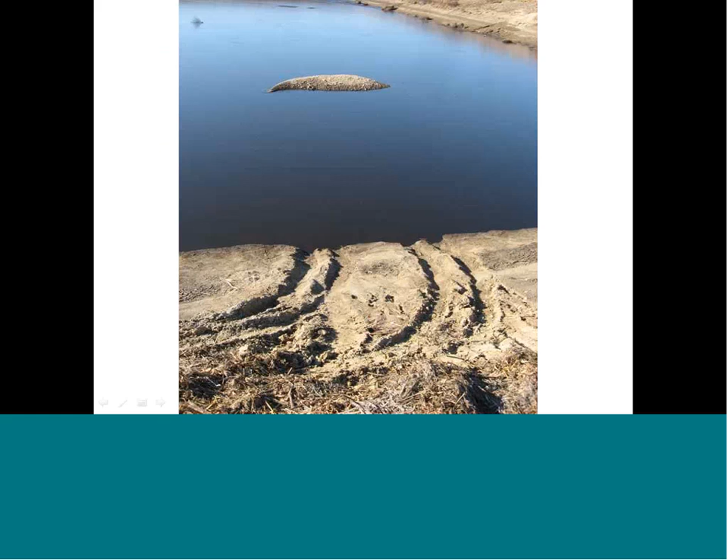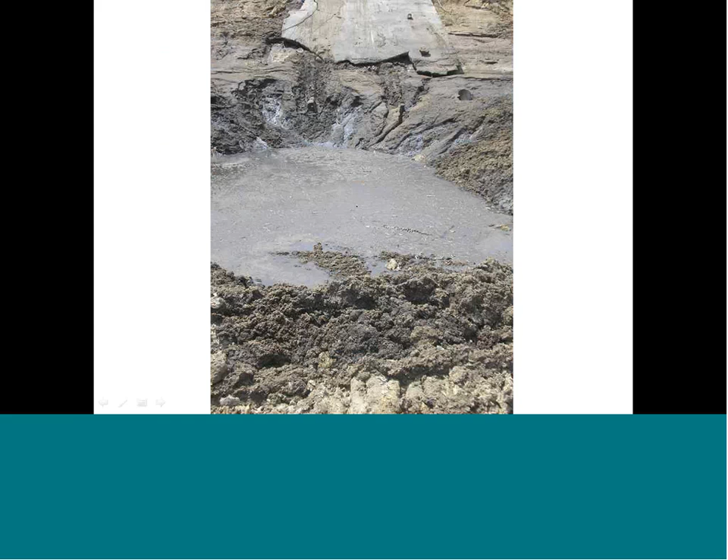What does it look like when it's emptied out? You see these holes, right? This one has a ramp and no pad in the bottom. So they put the prop down in there and started agitating away and blew out the bottom of their liner. So you see these holes develop. There's another one, and we will make them go in and fix these.

That means totally cleaning up the basin and starting from scratch, so it's a costly fix. Make sure they have their ramps and pads as part of their installation.

Our role in the construction process is basically to check the checker. Technically, we're not required by rule to be out at the sites, but obviously we want to be out there. This is our time to get it looked at and make sure we get everything fixed and it's built properly. It's recommended you get out there at least once, at least at the end of the project before the backfill. Obviously it'd be nice to go out there 3-4 times, but not all of us can be out that often.

And then when can they use the lagoon? Basically, as soon as it's done, they can start using it. They don't have to wait for our approval, provided they give us the proper notice for backfill, that they finished construction. We had our chance to get out there within that 3 days. If we don't get out there, they don't have to wait for us. So they can go ahead and start using it.

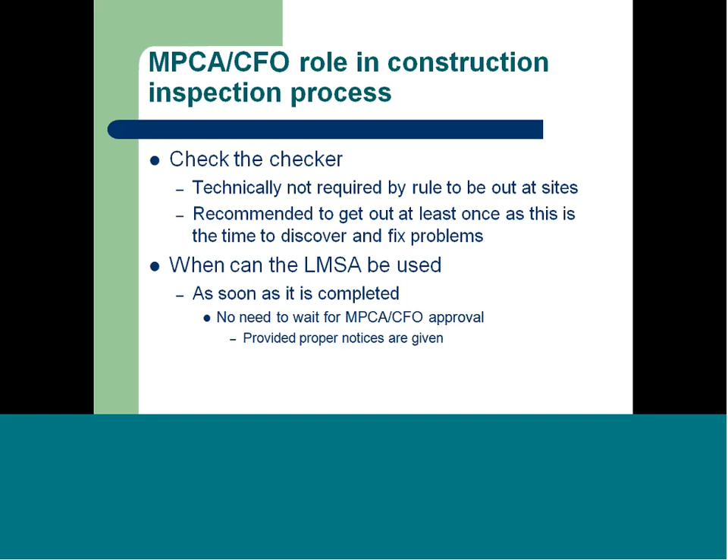And how do you handle major problems? What if you see something that's way wrong or have a question about something? Talk to the engineer. They're usually more than willing to fix any issues that are out there, mainly because the issue gets reported to us saying they fixed all the defects that we saw. So if they can't say that, I don't know how they're going to sign off on the project.

Now, if we don't get an adequate construction report, they can be required to remove manure for additional investigation or repairs, and this just recently happened last year. We could not get a proper construction report, so we made them clean out some of the pits and go in and do concrete coring of the pit to make sure they had adequate depth and thickness of floor and adequate rebar spacing. So it was a costly venture, but it had to be done.

So you can approach it from that angle: you either fix it now or fix it later. Later is going to cost a lot more, so it's better to do it now. The question that always comes up is, should you stop the construction process? You should rarely need to stop the construction process. Your best bet is to call one of the engineers or call a staff person at the PCA and get their take on it.

Most of the time, fixes can be done later on. It just may be more costly.

You could have to stop it if they're using a substandard material. Let's say they're doing an earthen basin job and the material they're using is not clay, a very marginal material instead of the proper material. You may have to stop it then, but that would be a rare case. I don't think I've ever stopped the construction process. We've come up and halted it for a little while once an engineer got on site and told them to do something differently or fix things, but it didn't stop for any length of period of time. So it should be rarely you need to stop construction.

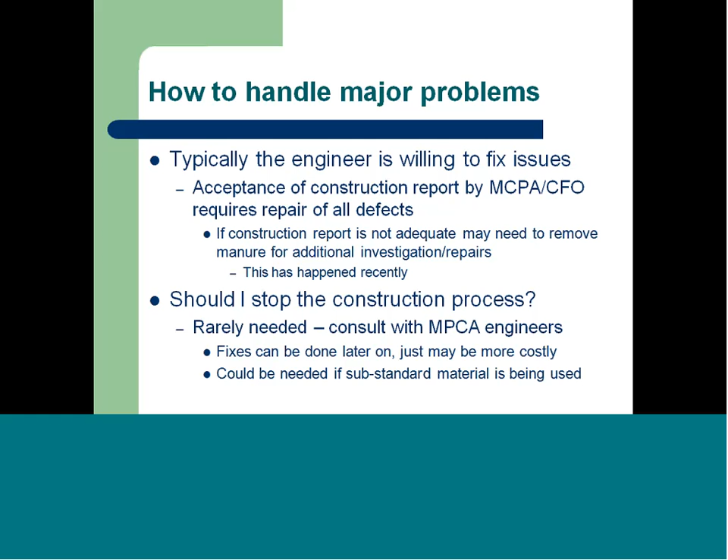Some other technical items we have out there, some resources for you. We have finished a concrete pit review checklist, which hopefully you all are familiar with and are using. We have a big concrete pit guidance document. And as soon as I get comments back from the NRCS and BWSR and everybody, we will have our earthen basin design guidance document finished. We've got some other future plans that, as time allows, we get to, but hopefully we'll have an earthen basin design guidance document out January 1st. So I think that's all I have.

George, we had a couple questions come in while we were finishing up. Yep, one was, hold on.

Will a sock for tile line work with no rock? Yeah, I personally prefer having a rock around it, but a sock is supposedly supposed to do the same thing as rock, keep the silt out of the tile. Like I said, those aren't required. Most engineers will do them, some will not.

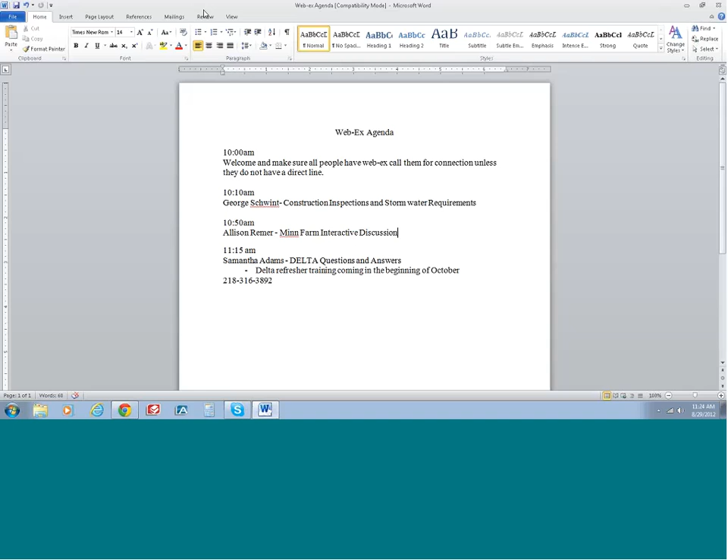Good job, guys. Thank you.